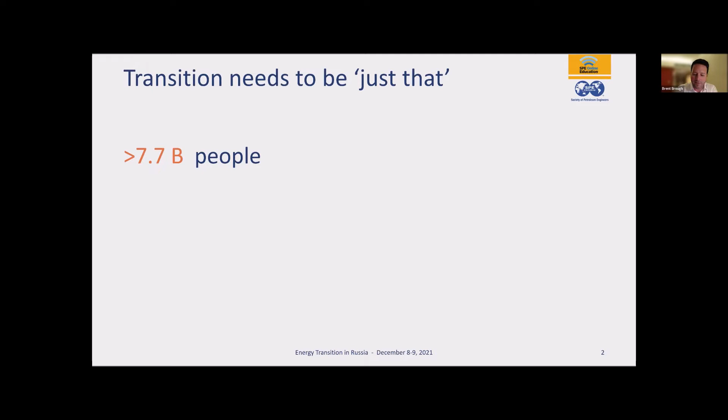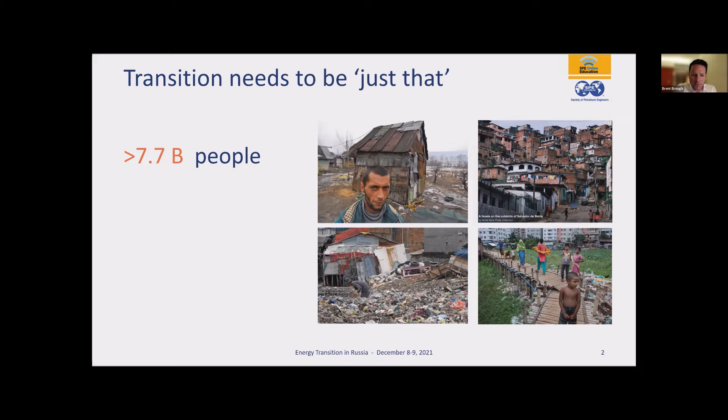So I think to start off, I'm going to start in a broad sense, and to talk about a transition, it needs to be just that. We've got 7.7+ billion people in the world. And when we're looking at the aspect of the world, depending where you are and the luck of the draw and where you're born, you have a real different view of the world. And when everyone's talking about energy, it means many different things to many different people from many different countries.

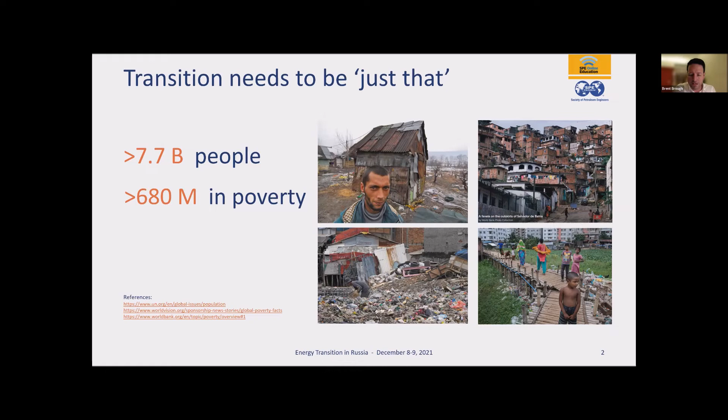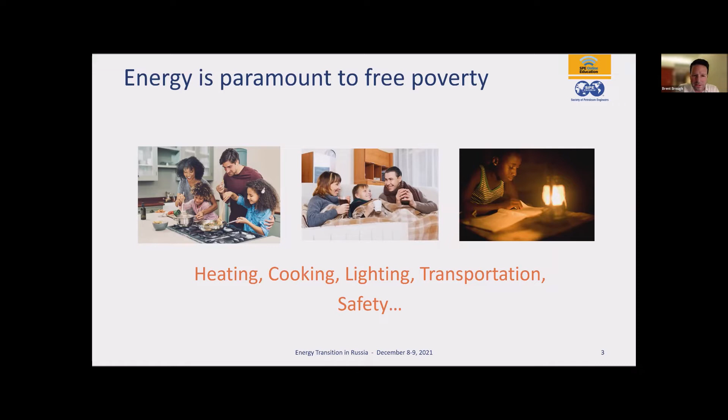So if we're looking at almost 700 million people in poverty, there's a massive amount of perspective that needs to be taken on this. You look at the energy that's required for heating, for keeping people safe, allowing lights to be held for electricity. Most people around the world that are not in the luxury side of the world, they want to be able to just keep their families safe, to provide an ability to send their kids to school where there's lights, the ability to have a warm home, and heat and energy to actually be able to cook in a safe environment for their family. So when we're looking at this paramount transition shift that the world's talking about, we need to actually understand that the majority of the world has a very different perspective on this lens.

So one question we're going to talk about in this discussion is, how do we escalate in a very economical fashion lower carbon oil now, not waiting until next year, not waiting until 2030, not waiting until 2050. We really need to apply the technology to aid in this transition. And when I'm talking about the transition, we're talking about lowering the carbon impact for oil production. So one key aspect that can dramatically lower the emissions is reducing gas flaring. Why are we actually producing the carbon out of the earth to then burn it and then try to figure out a technology that actually needs to capture it?

It's almost insane when you think about it. You're bringing excess gas to surface, and then you're burning it because you have no way to capture it, hold it, or transport it. And that equals emissions. So if you can stop the gas from coming to surface and leave it in the ground, you have less emissions to tackle topside, less CO2 associated from that. And then you don't have to try to capture the unassociated, unwanted CO2 from flaring.

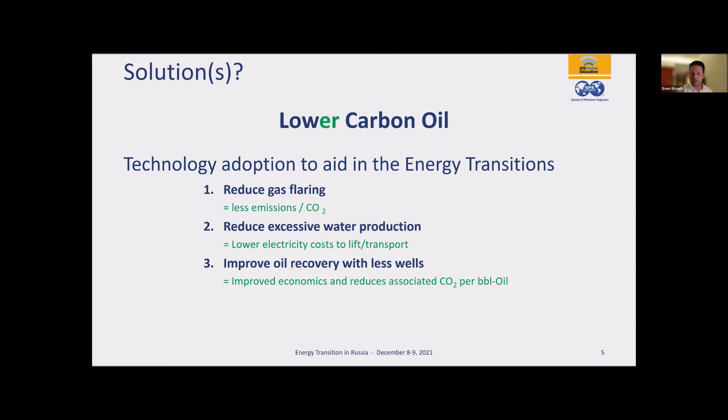So it's a bit backwards to look at why we're actually trying to produce all of this gas and water to surface. And then we need to improve the oil recovery with less wells, because when we have too many wells involved, you have more associated CO2 for each well to get that associated barrel of oil. And if you can get away without having to do as many well interventions into the lower completion to make changes, that's associated CO2 from the trucks, the personnel, the time and the energy required.

So transition requires change. And I'm going to show this here. You see 10 bottles, I chose Perrier. It was just a nice, pretty picture.

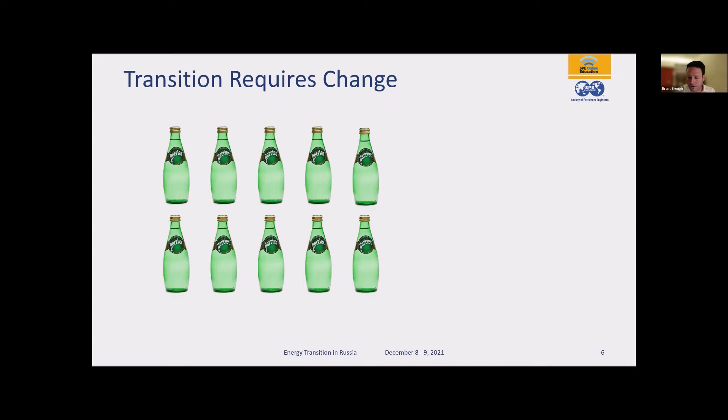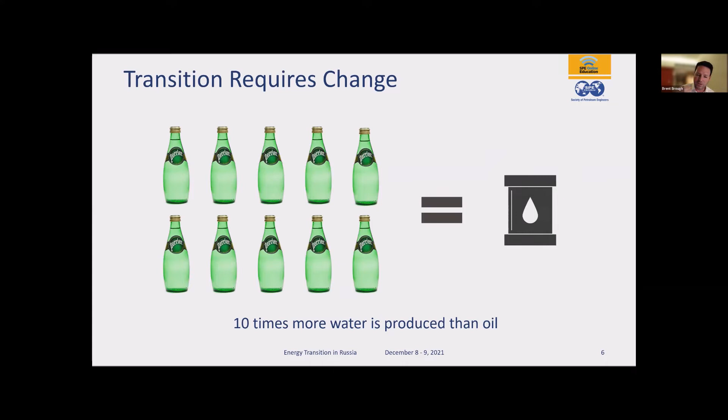But you have to think, is the oil company in competition with the water industry? Because on average, it's 10 times more water than each associated oil produced. Now just pause and think about that. 10 times more water per each oil barrel produced. This is a really, really poor energy exchange to try and get the water and oil to surface when you don't have to, because it requires so much energy, and that energy has associated emissions.

So if I take a step back, I'm going to talk about how we are applying technology to help and support this energy transition. We're looking at existing oil reservoirs around the world where there has already been significant investment. But how can we impact beneficially by reducing the environmental associated emissions? The technology we're using, from a completion aspect in the energy transition, is the AICV technology, or autonomous inflow control valve, which automatically chokes the high water zones and allows the oil saturated zones of the well to be produced.

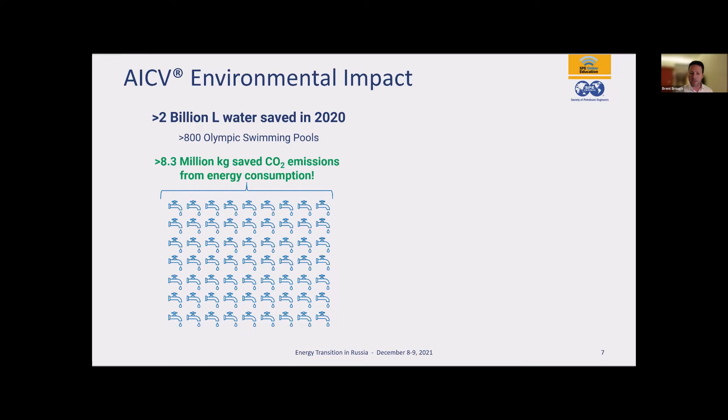Now, if you average an 800-meter deep vertical well and you're producing that to surface, that's 8.3 million kilograms of associated CO2 emissions just from the energy of the pumps to produce it. Just from the pumps - that's not treating the water, that's not sending it to the treatment plants, that's not the energy required to re-inject it. That's just the lifting costs. 8.3 million kilograms of CO2 emissions.

Now, if we look at gas, in the last 4 to 5 years, we can document - and it's actually a bigger number than this - by applying the technology, we were able to capture over 35 billion barbecue gas tank equivalents. We use barbecue gas tank equivalents because most people around the world have a barbecue with a gas tank beside it, to visualize how many volumetric versions of this gas tank would be saved. That's 1.1 billion kilograms of CO2 emissions saved from not having to be flared. These are crazy numbers when you look at it.

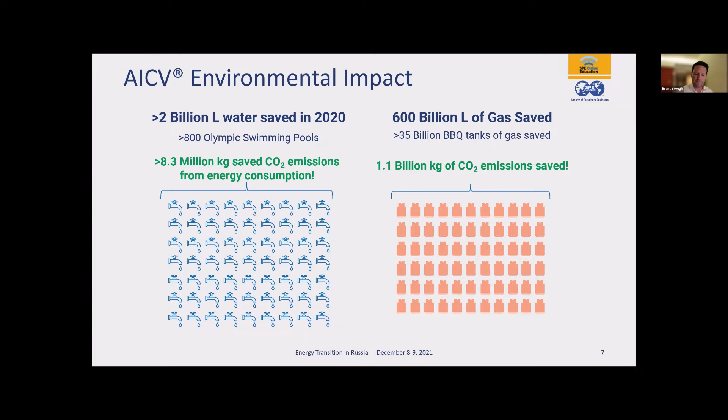So I'm going to show you a video on how the technology is deployed. When we assess the reservoirs and look at whether we can apply a technology to help reduce the water and gas being produced, it's a long engineering approach that we look at.

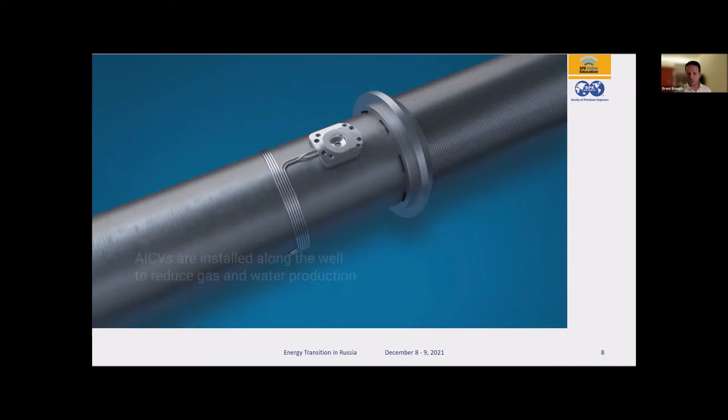First of all, is there enough economical oil saturation remaining in the reservoir? That's the first important part, because we haven't unfortunately found a way to make water into oil yet. If you have a solution, please let us know.

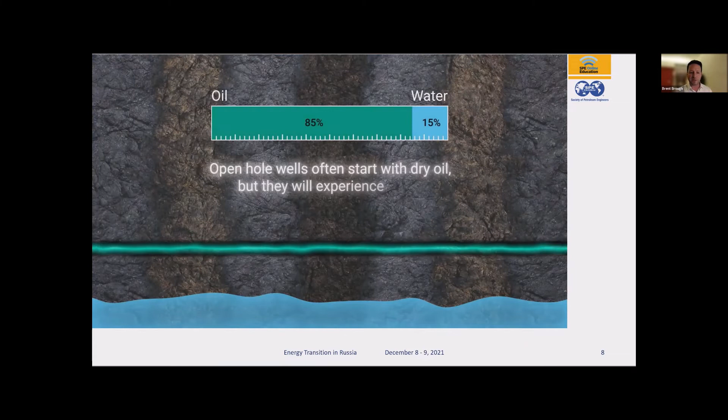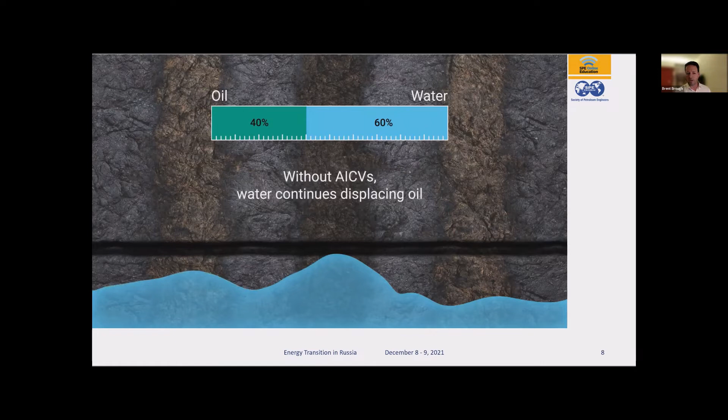When you look at this animation, open hole wells without a completion don't have control on the unwanted phases of the fluid. You can see it's showing bottom water coming into the reservoir and into the wellbore. As that water ingress comes in, you start producing a lot of water, and as you pull harder on the well, you'll produce more of the bottom water.

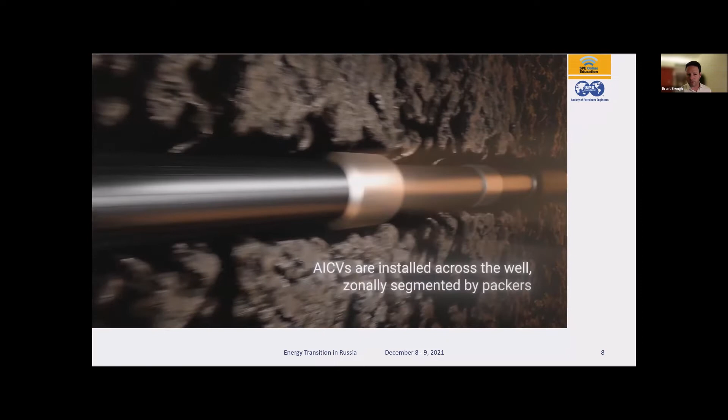The easy way to resolve that is to choke it at surface. But when you choke at surface, you do not access the oil saturated in the reservoir section.

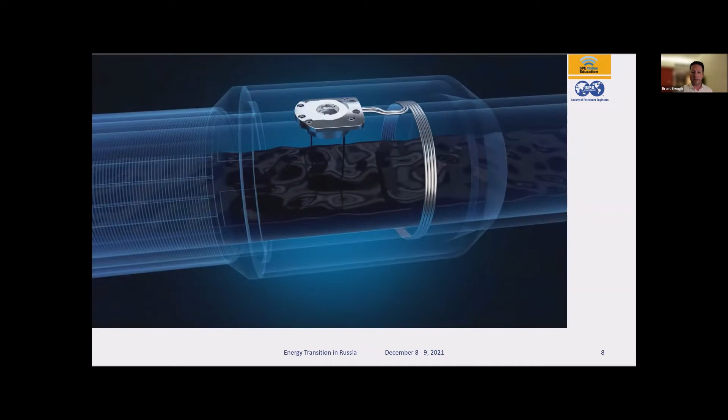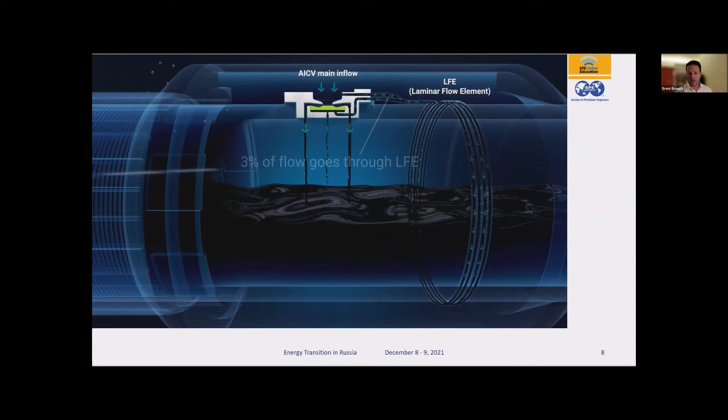So by applying the autonomous inflow control valve, the valve manages the uncertainty in the reservoir. When you get water in a section of the well, the valve becomes more restrictive, and where there's oil in the section of the well, the valve becomes relaxed and stays open.

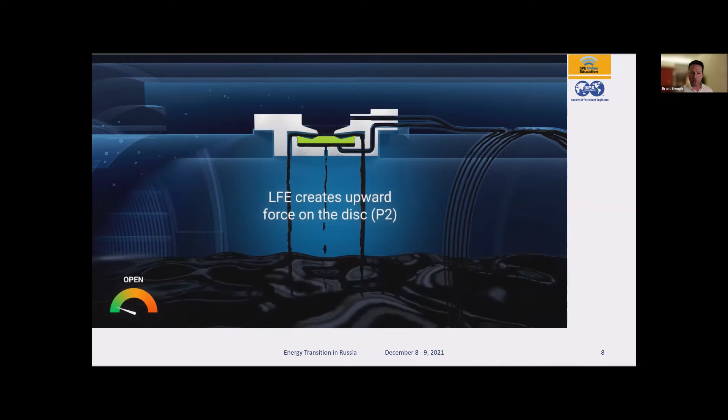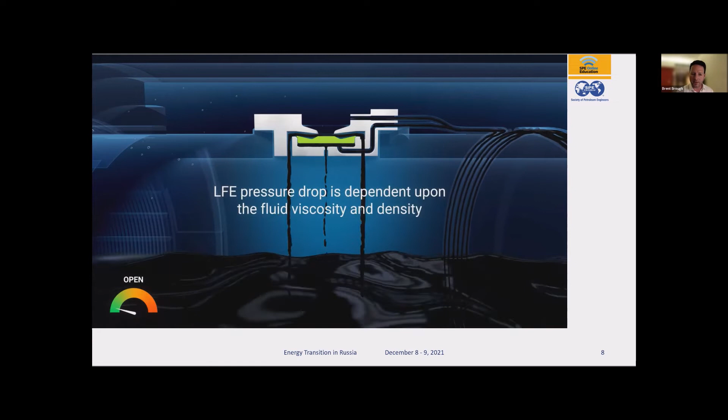As you can see here, the main flow of the reservoir fluids, whether oil, water, gas, or a multi-phase composition, flows through the valve, roughly 97%. A small amount goes through the side outlet, the LFE, or laminar flow element, as you can see on the right-hand side of the screen.

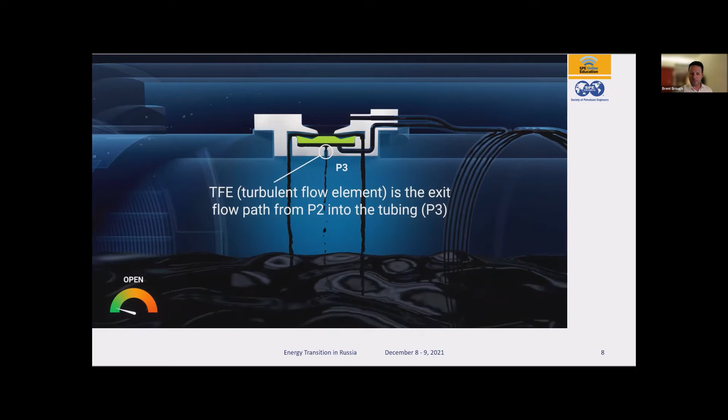The fluid properties of this multi-phase flow going through the valve create a certain pressure drop through the laminar flow element, which creates a pressure or force pushing upward on the piston. The oil moves through based on its viscosity and density, creating a certain pressure drop through the laminar flow element.

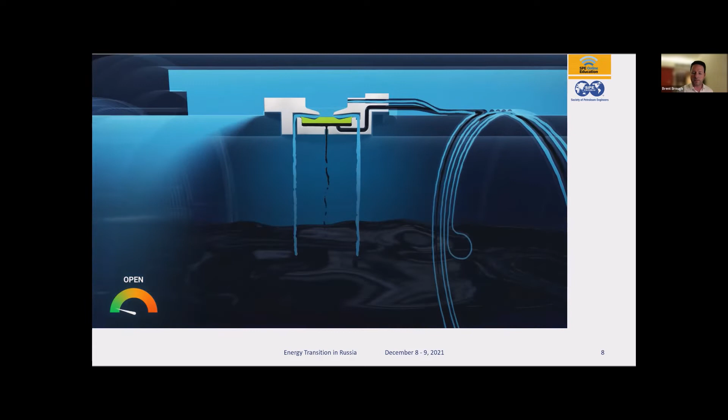In this cartoon, you're going to see the water showing a rapid ingress. As the water has lower viscosity, it creates a higher force on P2 and becomes more restrictive, choking off the valve.

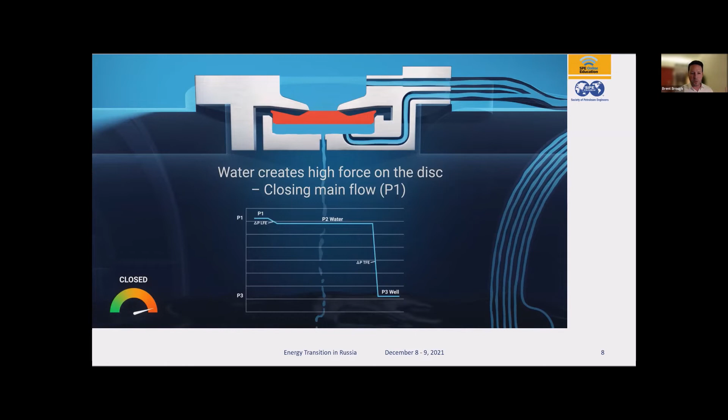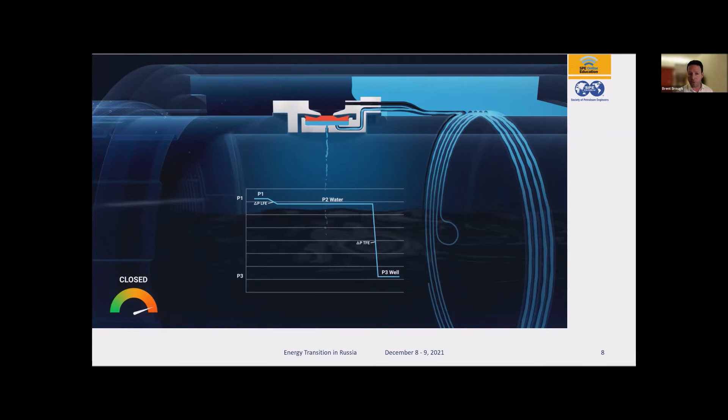So what that means is that when you have the valves in between completion packers, mechanical or swellable, they isolate those sections of the well that might have unwanted phases such as water or gas or both, and then the valve starts to become more restrictive.

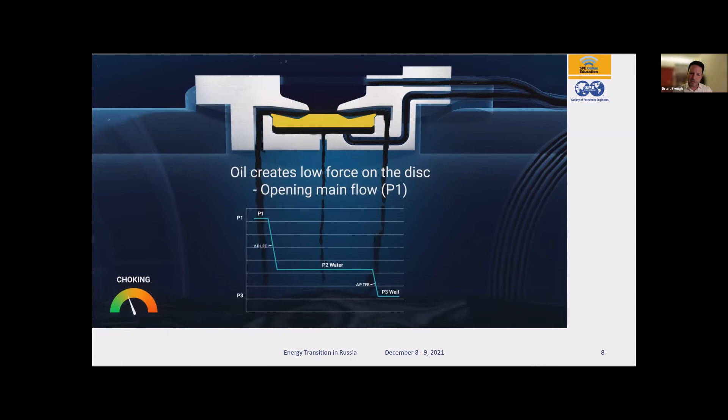So you don't have to choke your well at the wellhead. The choking occurs along the completion section so that you can actually remove or reduce the amount of unwanted water and gas, while the oil saturated sections of the well are allowed to produce.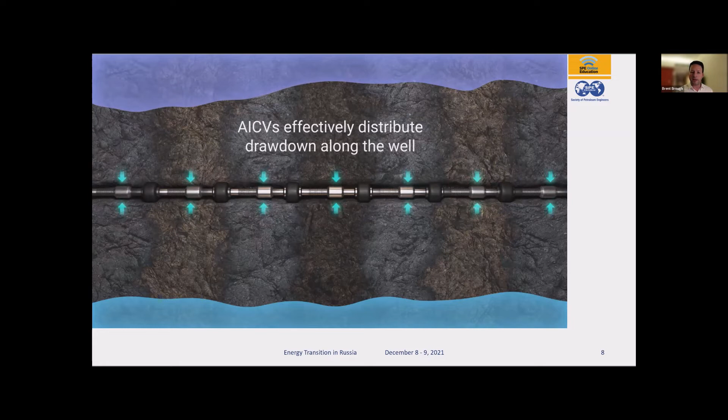As you see in the cartoon on the far left, it's showing a gas coning breakthrough at the heel. In the middle, you're seeing water breakthrough at the center. Now you can see that's isolated with these swell packers in the animation.

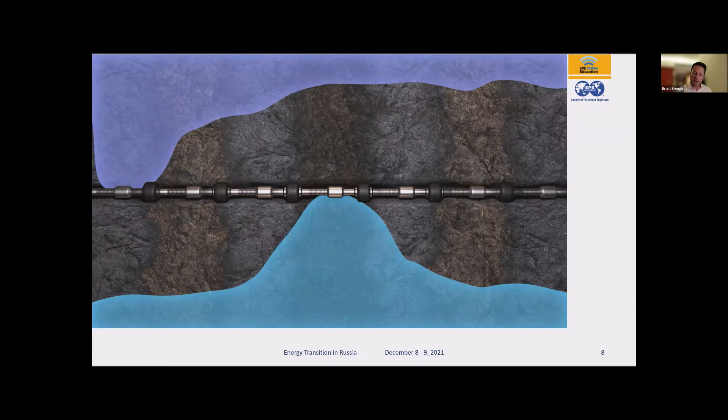When you have the oil there, it needs to have the ability to be produced, and the valves will allow that ability to be produced without producing the unwanted high water or gas sections.

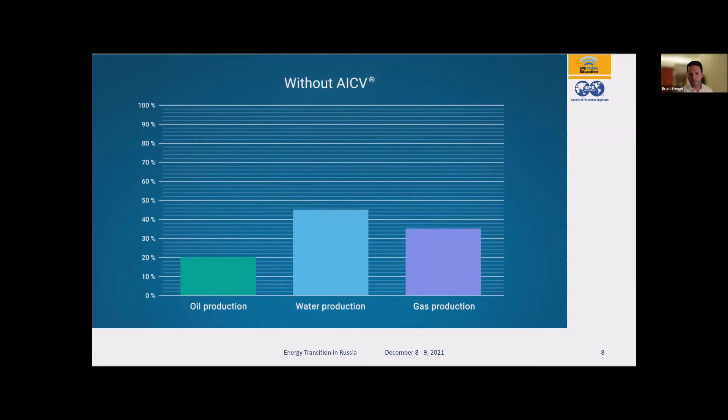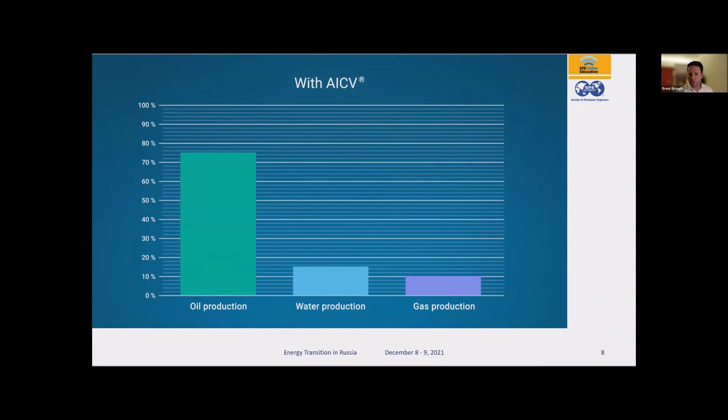And if you have a very late life reservoir where you need to produce more water, we can make the valve more relaxed so you can produce a higher water cut, but you don't want to produce the 98, 99% water cuts in the zone.

So the whole premise is to enable the reservoirs that you have, the oil wells, to produce more net oil. You produce less of the unwanted phases, and then you don't have to pump the water to surface or flare the gas. You actually allow the reservoir to be depleted in a more economic phase.

So you can see here, I've got a snapshot where you see isolation between the sections. You need zonal isolation to make sure that the water doesn't flow everywhere or the gas flows everywhere. The valves remain open based on the fluid viscosity and density of the oil compared to the water and the gas, and the valves will be designed for the reservoir.

So if you have a different reservoir, Sakhalin Island, or a different reservoir in the northern parts of Russia, or in Turkmenistan or Azerbaijan, they all have different reservoir properties.

We tailor the valves according to the reservoir. We design it based on the reservoir depletion strategy and then apply it.

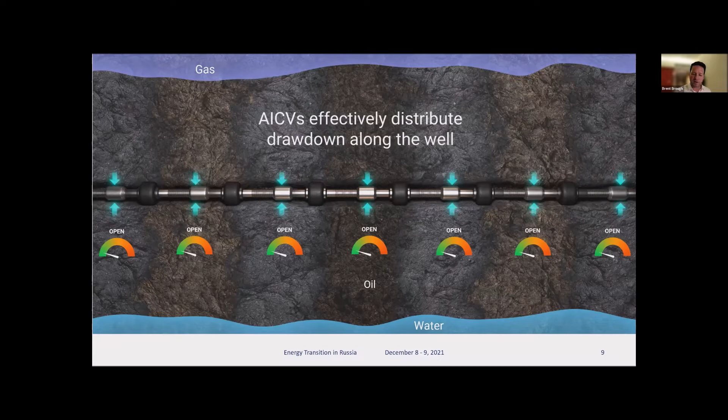As you can see in this exaggerated cartoon, as long as the reservoir is isolated with good compartmentalization—packers matter, by the way, bad packers will not allow this because the valves are very robust—but if you have the phases flowing from one section to another, the valves will close if they see water, and choke restrictively on gas.

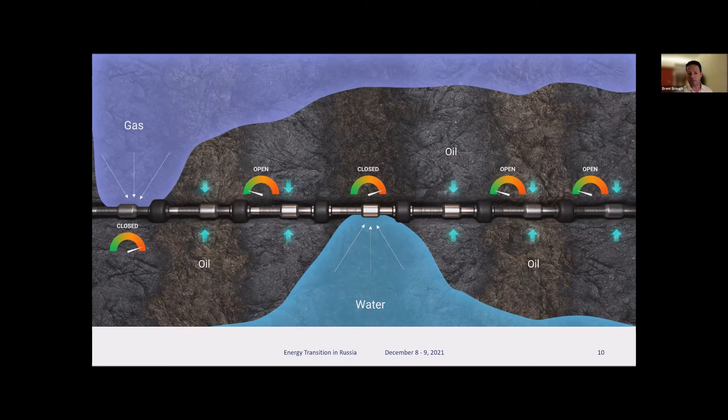But the great part is when you have good compartmentalization, the valves will allow you to produce much more economical wells with a great reduction of emissions, because you don't have to bring the unwanted water or gas to surface. And it's very simple.

From a deployment perspective, it's low cost. The payback period is very fast. You don't have to have excessive people on the rig, and you run it in just like you're running in sand control.

There's a sand control filter that filters out the reservoir section, goes through a small housing about 18 inches long, and you isolate the reservoir compartments with the packers. The fluids flow through the reservoir, the screen filter, into the housing through the valve, and the valve behaves as it's designed—stays open for oil, becomes more restrictive as the GVF, or gas volume fraction, increases, or the water cut increases.

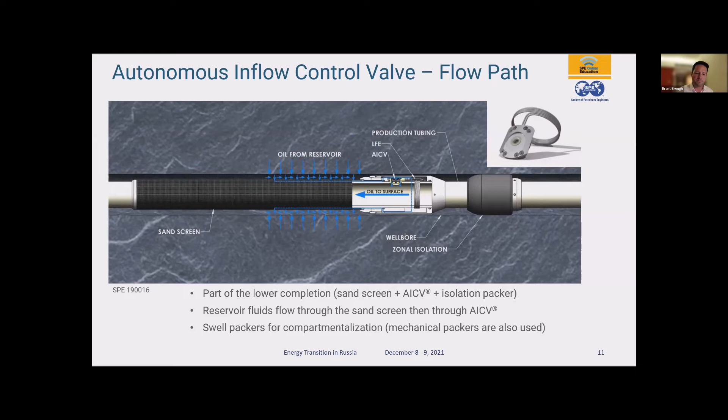Now, it's all about the economics. It's not about talking about what we're going to do in 2030, what we're going to do in 2050. We need to do this now.

There's so many wells shut in—tens of thousands of wells shut in around the world already. And we need to get the oil out in an economical and environmentally better fashion.

The payback period on this retrofit application within these 3 wells is a couple of months. This is where we should be focusing our efforts in the oil industry in terms of actually making measurable and meaningful transition benefits.

So how do we do this? You can see in this slide we're showing a lower permeability zone and a higher permeability zone. When we look at it, we just have to do proper engineering. We have to understand where the fluid is going to flow from in my reservoir, and then how do I manage to produce more of the oil for longer without having to intervene into the wells?

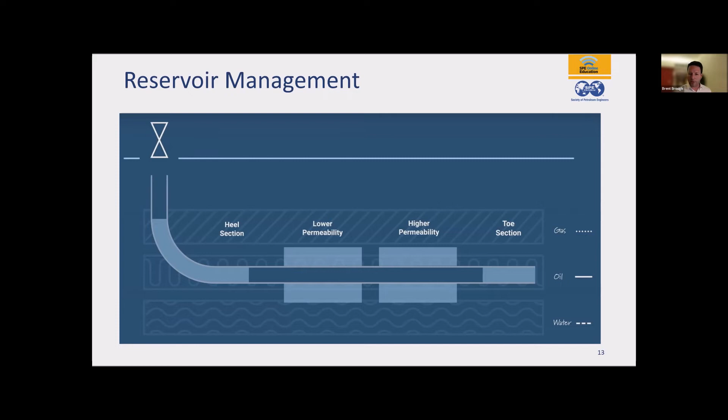We know there's going to be non-uniform production due to variabilities in the perm, so we have to understand how can I handle this. Before, you run sand control or screens to filter out unwanted particles, but that does nothing to discriminate the phase, because you do not want to produce the water. And if you produce all of the water and start pulling harder on your well, you start to cone much quicker. So when you have these high perm zones, how do you actually stop them?

Well, when you go in and apply this technology, it will take care of the unwanted zones automatically. You segment the well depending on the length, and add a certain amount of valves depending on the flow rates. Then the differences between the perm becomes a non-issue, because the zones that have the unwanted phases—such as water or gas breakthrough in the higher perm section of your reservoir—become managed in the well without any intervention, by the autonomous inflow control valve.

Then the sections, you might have a lot of stranded oil stuck in a lower perm section. They're going to now be enabled to be produced. It's as simple as that.

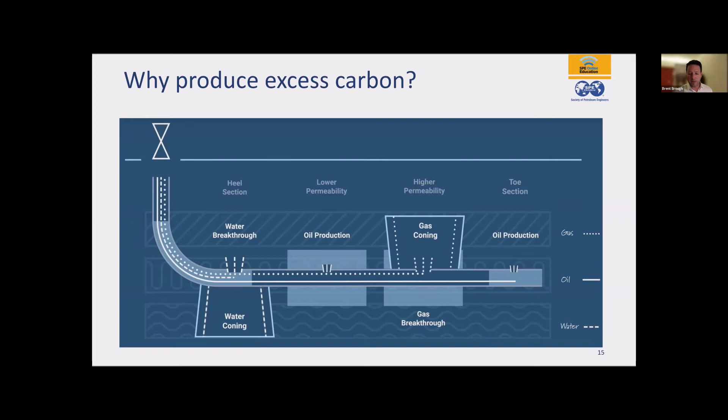There's no control lines to surface, so you don't have to change your wellhead, don't have to change your completion design, but you might have to change your pump, because when you stop producing so much water, you can actually downsize the pump required to get your reservoir fluids to surface, which is cheaper and less electricity to pump the surface fluids. Now, when we're looking at this from a global perspective, you have to look at the carbon intensity on the electricity. This is just an example we use because we help our customers all over the world try to measure the impact of their CO2 emissions.

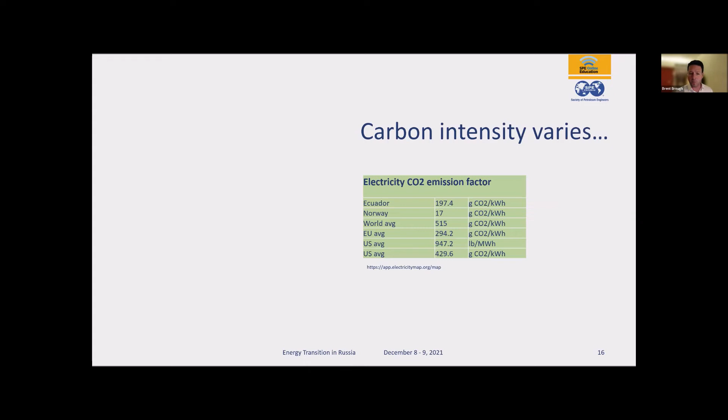So if you look at Ecuador versus Norway, well, Norway is blessed with Mother Nature that has a lot of hydro, so they get very low associated CO2 per kilowatt hour. But in Ecuador, you can see it's 10 times more than the Norwegian. So these are figures that you look at.

Now the whole question is, you're pumping all of these fluids to surface. And as I mentioned earlier, the oil industry is probably one of the largest water industries in the world. You have to pump it to surface, which costs associated money and CO2 emissions, and then you have to have even more money and electricity to treat that water and re-inject it. And then there's all the technologies talking about trying to capture the CO2 that you've just burned by just trying to pump the unwanted water.

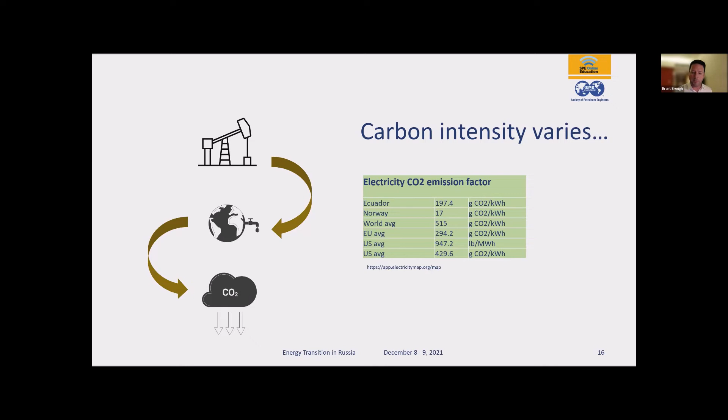And we're in the oil industry to produce the oil at the lowest possible cost and the payback time as fast as possible, and recover as much oil as you can. But the economics matter. And we do not actually apply the projects if we can't help the oil companies make more money.

So you can see in this case, every application we go to, we can document and quantify in terms of economics from the payback period, the oil increase recovery, and the results from reducing the water and gas and associated tonnage of CO2.

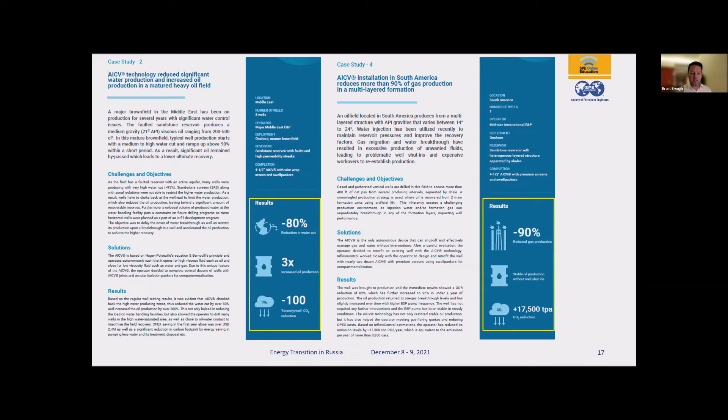And all of this is really critical for this energy transition, because if you look at what Equinor has come out with in the last few weeks, BP's CEO has come out with in the last few weeks at the conference going on in Houston right now, it's all about funding a transition. And most of the oil companies need to do something now, not in 5 years, 10 years, or 2050.

So I'm going to talk about a case study. This is documented in the IPTC 20195, so it's public data. The challenge: this well's been around for 13 years. The well was shut in due to high GOR, gas oil ratio. It's in a carbonate reservoir and a very light oil, 0.45 to 0.65 centipoise. This is ultralight, encroaching on the gas phase. It's a 1,500-foot horizontal open hole.

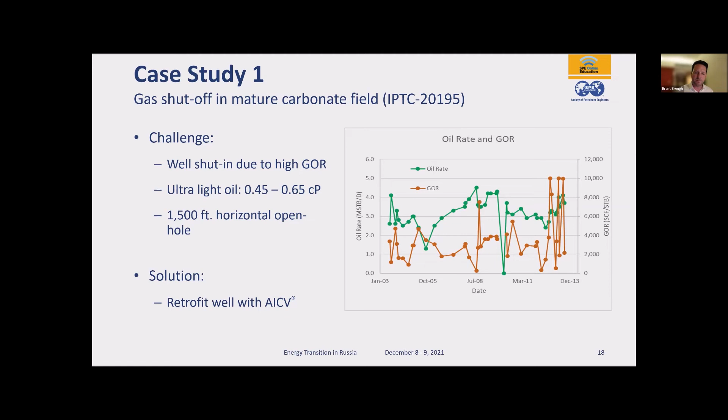And the solution, after much review within the operator, was to do a retrofit. So the existing well is a barefoot completion. So when we look at this approach, the first question is, do you have oil left in your reservoir? This is an existing asset.

So we look at the data, and the operator ran a log, an FSI, to understand the perm profile and the oil saturation. You can see here the permeability log overlaid with the saturation. Then on the bottom was the design we approached in terms of how to segment the reservoir by packers. The packers used were a mixture of mechanical open hole packers and long swellable bonded packers. We segmented the reservoir into 10 sections, and applied 22 dual AICV joints due to the flow rate requirements by the operator. Then we did an acid treatment prior to the AICV installation.

A key point here is the operator flowed the well back before running the retrofit completion to ensure there was no redistribution of the gas and that oil actually encroached back. They turned the well on, tested it, and the gas was still there, over 10,000.

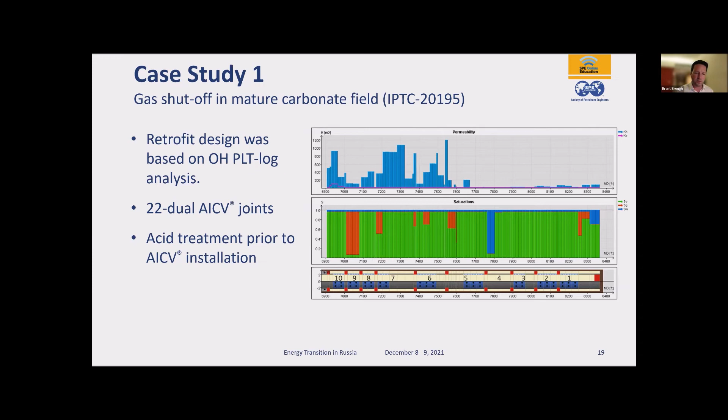Now what you're seeing on this next slide is the log data, the pre-retrofit of the autonomous inflow control valve into the existing 13-year-old wellbore. You can see on the top there's very good oil saturation on the top log.

On the bottom, you can see how the AICVs managed the big gas breakthrough and enabled the wells to produce the lower section. If you look at the graphs on the far right, upon the retrofit completion into the existing old well, the well that had stranded hydrocarbons at the toe section was enabled to produce 5 times more oil from the lower section and reduce the gas roughly 90%.

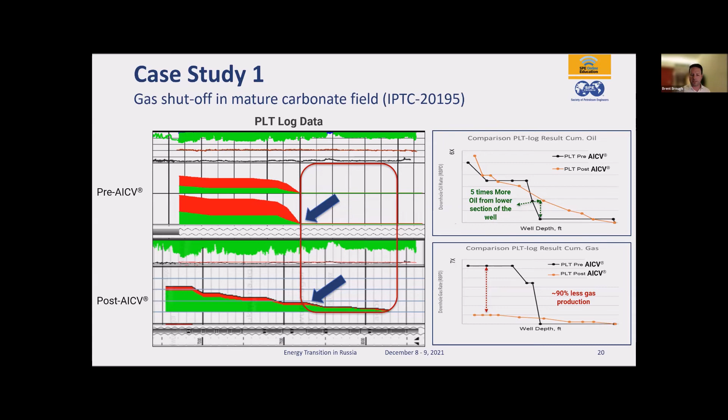What that enabled is the economic payback was in weeks. They paid the drilling, workover, rig, and completion costs in 3 weeks. The well is stable for over 4 years. The GOR was reduced by 90%, and they didn't have to drill a new well for this. The existing surface infrastructure was able to be used. Very low payback. So this is a great example of enabling technologies to help fund the transition towards lower carbon oil. Here's case study 2.

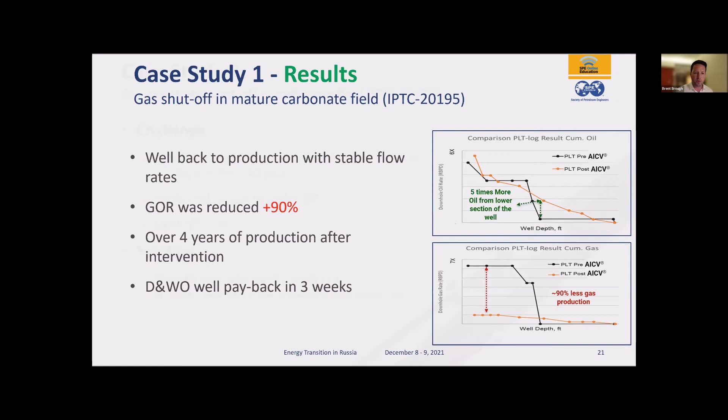It's a different application, roughly 4 decades old brownfield carbonate oil field. The wells were shut in due to high GOR. It's a light oil, roughly 2 centipoise. The retrofit solution chosen by this operator, in IPTC 21411 as you can research, was to utilize AICVs in combination with swell packers.

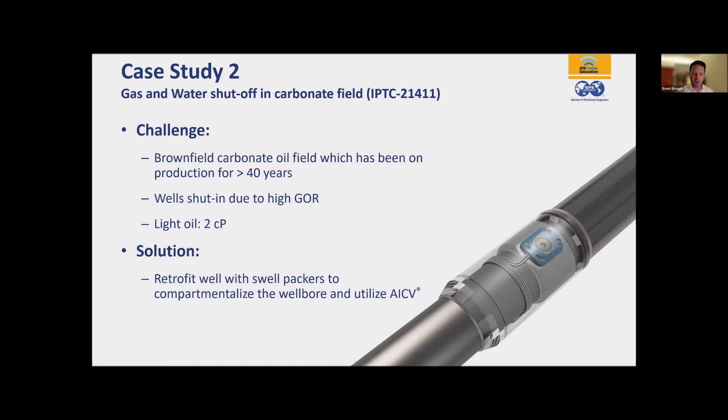So you can see on average the gas production reduced by 83%. This is huge because of the associated CO2 emissions from burning the unwanted phases. The water production was reduced by 83%, and the oil production was increased by 32%.

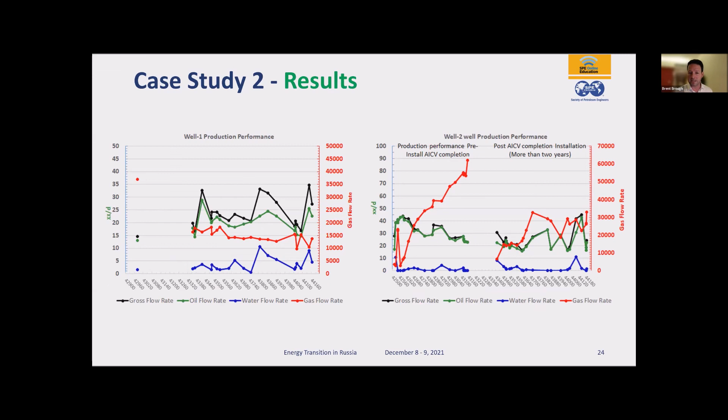So the achievements on the goals here: Did we reduce associated gas and emissions? Yes. Did we reduce the water? Yes. Could we downsize the pump to use less electricity? Yes. Did we increase the oil? Yes. Did we improve the profitability? Yes. These are all key approaches.

So the conclusion: in this energy transition, oil is required for the coming generations. I've got kids and they're all focused on renewable energies and whatnot, but I'm trying to be honest, oil is required for pharmaceuticals, for transportation, for building—all of the products we're talking about, the computers right now, the phones we use, there's oil in everything we use today. It's going to be required to have a transition. We need the lower carbon oil now, and we can do it.

The technology's here. We don't need to go and reinvent anything. It's all about changing our mindset, taking some time to engineer the application, not waiting 20 years. We can do this now. The technology is available. We can lower the emissions and the CO2 within a week of applying the technology into the well.

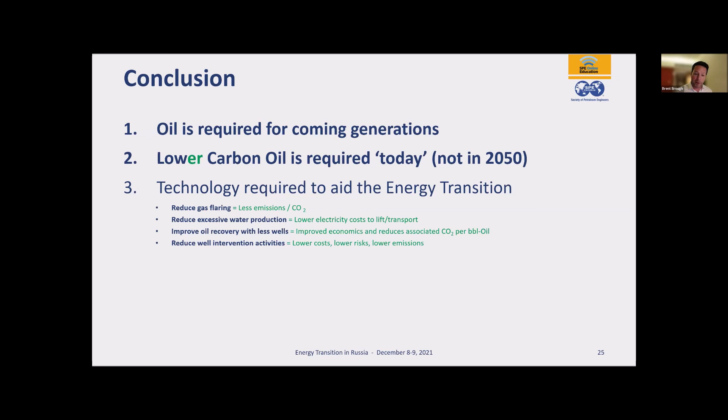So we get pretty excited, as you can tell from my presentation. We're pretty excited as a company because we're in the oil industry and we're proud of this because it fuels the world. And we need to enable our customers to make the profit to then invest into the alternative energies. So that's all I have. Thank you very much.

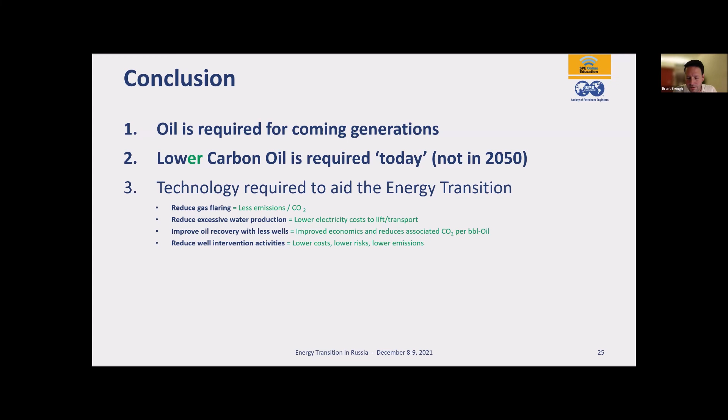Yeah, so I think when we look at the energy transition, going to renewables, nuclear, solar, wind, it's all about sources. And I think before the transition occurs, we're going to have to look at how you fund the transition. If I go back to one of the earlier slides, the requirements for actually going to alternative energies actually requires a huge capital spend, whether we're looking at private companies or governments.

And if we wanted to have a transition, I use the analogy, it's not like Harry Potter on platform 9 3/4, where you can magically walk through a wall and you're in Hogwarts. It actually takes a significant amount of money and a significant amount of engineering to achieve that. And if we look at the transition around the world, the electricity grids, for example, it's trillions of dollars that are needed to invest. So in this transition, what we need to achieve, with my hand on my heart, is lower as much carbon as we can from oil and gas.

Utilize the profitability as fast as possible to fund other technology from a research and development standpoint, and then actually be able to fund it without putting everyone into debt, raising too much taxes on everyone as individuals, because the combination of profit and the environment has to go hand in hand. But we need to think clearly about what we can do now. And I know I'm from Canada, and I look at all of the technology they're trying to apply for capturing the carbon. You can reduce the amount of carbon you're putting in the air. Stop, it's back to the engineering philosophies on this transition.

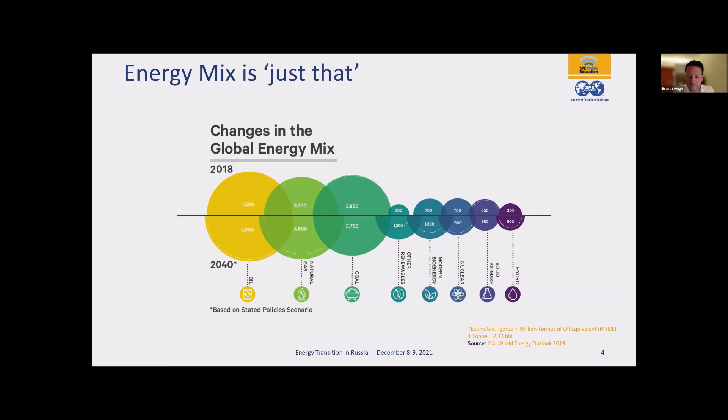Thank you again, Brent.